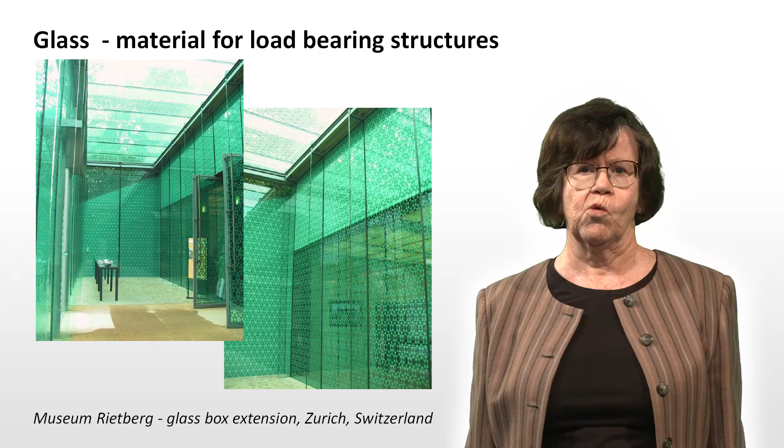Due to new technologies in production of glass and improving mechanical properties, there is a significant expansion of the applicability of glass to structural elements such as railings, stairs, glass beams, or even columns and load-bearing walls, as can be seen in the photos.

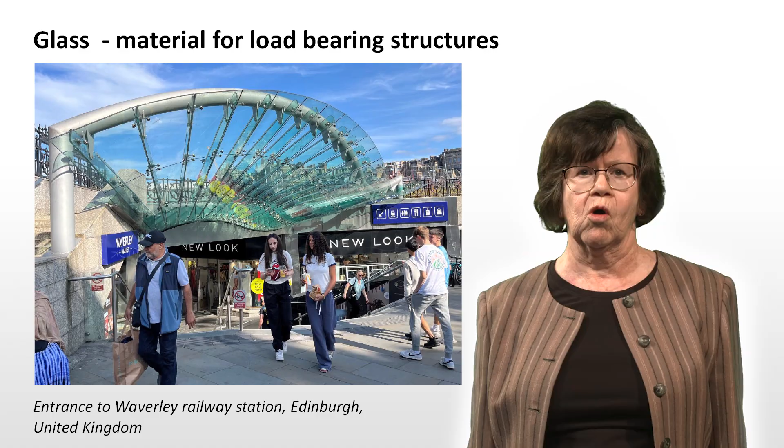In addition to their own weight, these load-bearing glass elements are also able to transfer snow, wind, and imposed loads. However, the design of such structures must be safe, taking into account the collapse consequences on both property and human life. Therefore, regulations have been put in place that define material properties and manufacturing, standardized procedures for experimental verification, and regulate the design of building structures.

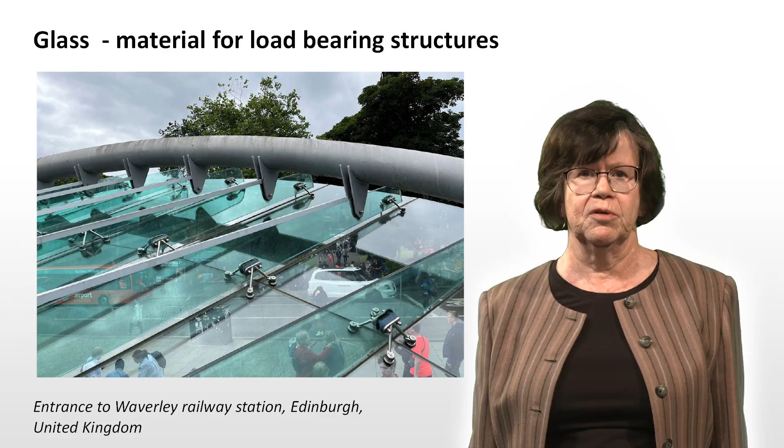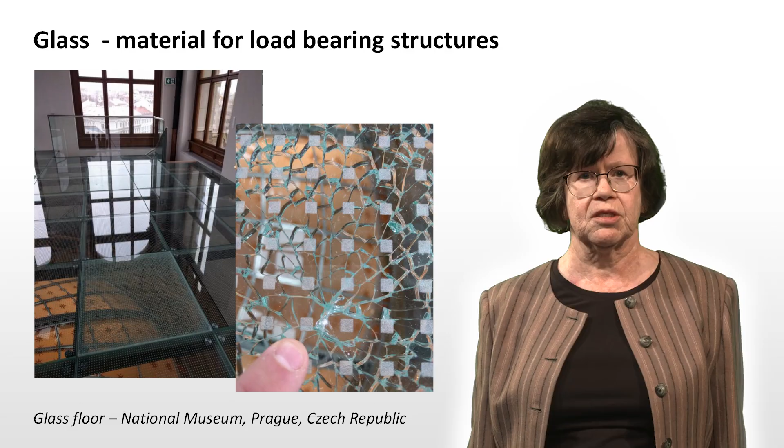From the national standards used until the beginning of the 21st century, the European Union has moved to the Eurocodes, which ensure the unification of general rules for manufacturing, testing, design, and assessment in the field of building structures. The aim is to ensure the same quality and safety in Europe in the field of civil engineering.

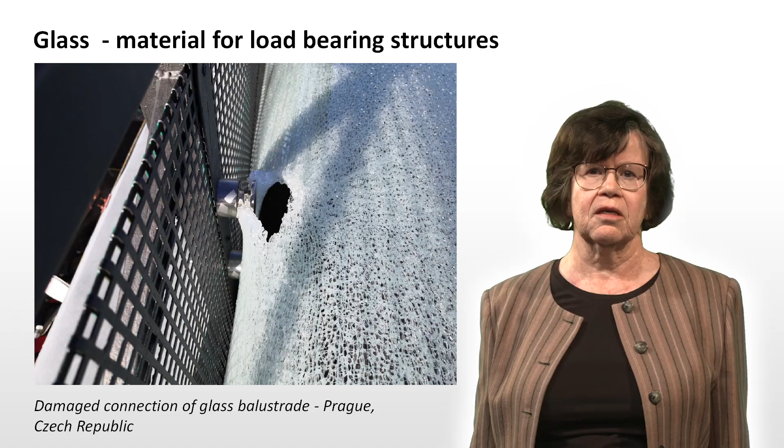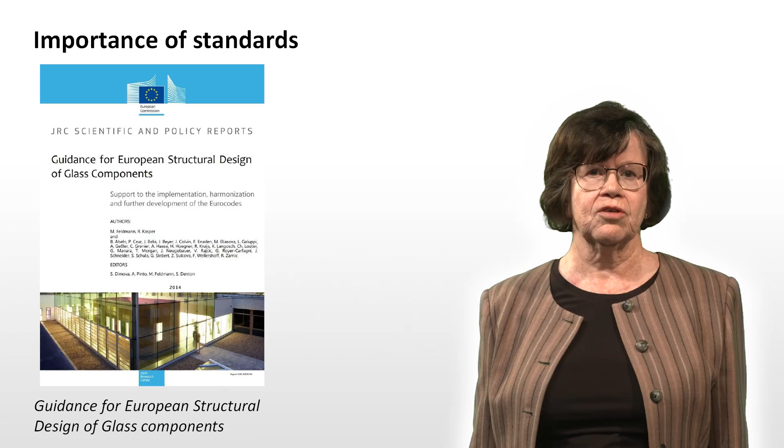The Eurocodes provide general design criteria and methods that meet the prescribed basic requirements in terms of durability and reliability. They also provide general guidance for designers, operators, owners, contractors, and manufacturers of structural products. In addition, these standards allow exchange and cooperation with EU countries.

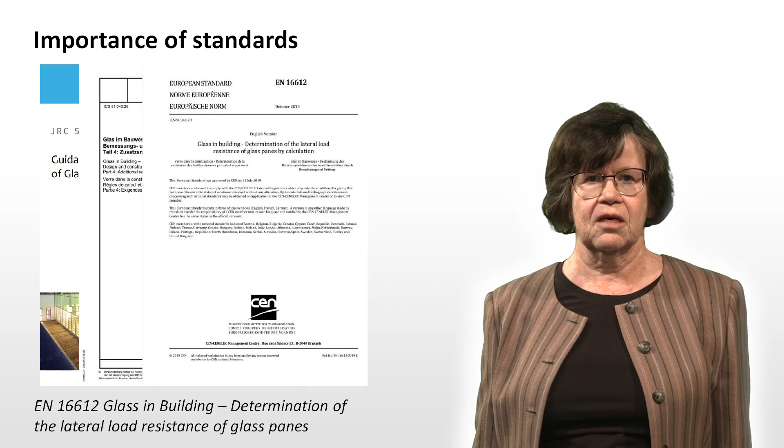However, national standards are also used within the European Union in cases where Eurocodes have not been issued or have not addressed national conventions. There exist American, Australian, and other standards outside the EU.

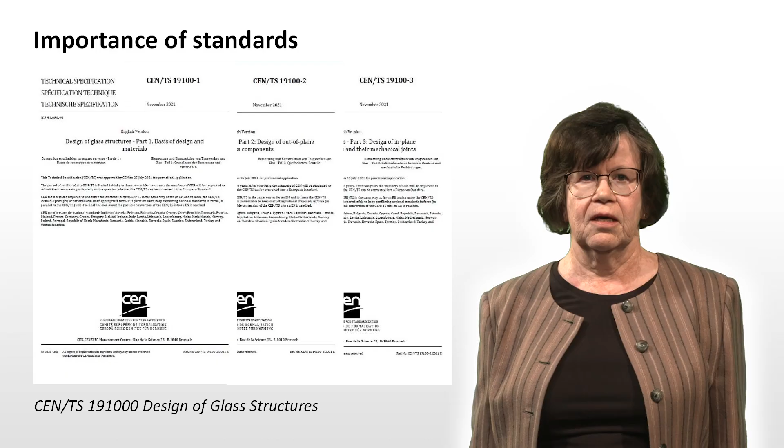Harmonized European standards are currently used within the European Union. These standards establish the same rules in all European countries, allowing for a free market for goods, projects, flexibility, and the same standard of products and goods or design.

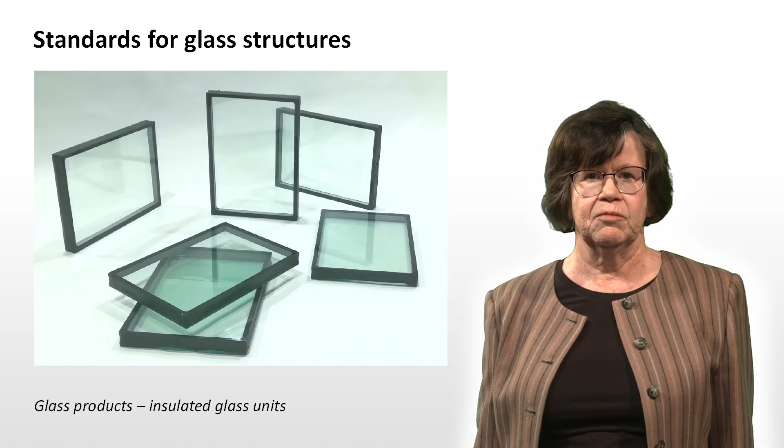Standards related to glass building structures can be divided into several groups. The first group is focused on glass production, including material properties, production tolerances, size, thickness, initial imperfection, and so on, rules for refining soda lime silica glass by heat or chemical treatment, and rules for the production of laminated glass panes.

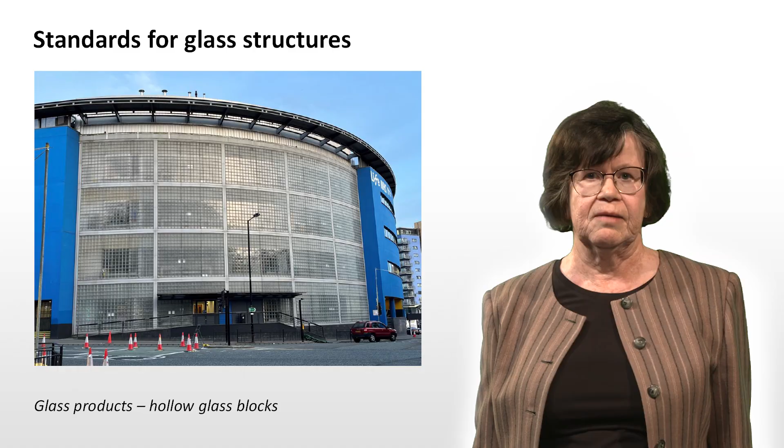This group also includes production standards for glass elements used in construction industry, such as U-profiles, glass hollow blocks, glass bricks, and so on.

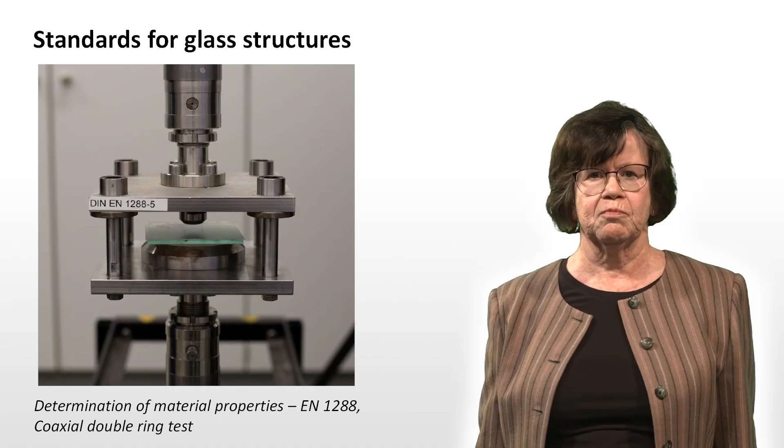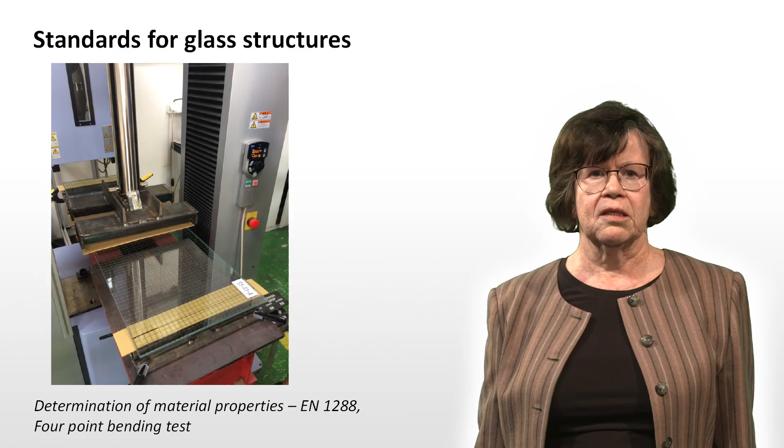The second group of standards deals with the material properties of glass and the method of their determination. Various tests are used for this purpose, such as the coaxial double ring test and 4-point bending, according to EN 1288. By evaluating the experiment, the tensile strength of the glass under bending and the Young's modulus can be determined.

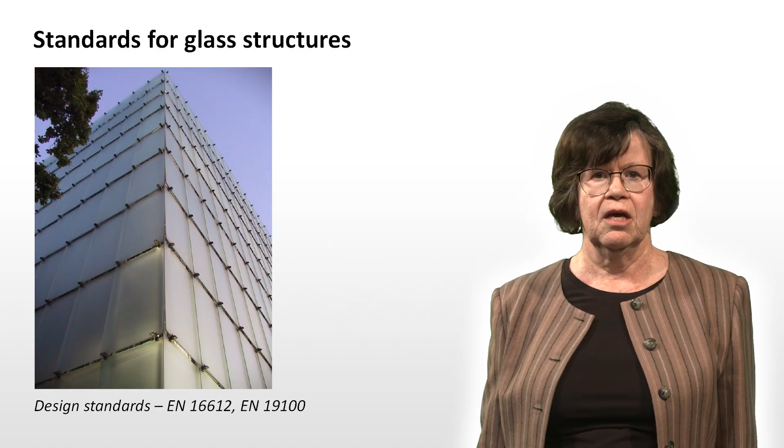EN 16612 can be used for design of infill panels that can be classified in glass consequence class less than CC1. This includes window glass or insulated glass units made from monolithic or laminated glass pane, simply supported along the edges and uniformly loaded perpendicular to the surface.

At present, a number of national standards, for example German, Italian, Dutch, can be used for the design of structural elements. The European standard for the design of load-bearing glass structures is under preparation. It will be available with the new revised generation of European standards under the designation EN 19100, and will be intended for the design of structural elements of glass consequence class CC1 and higher.

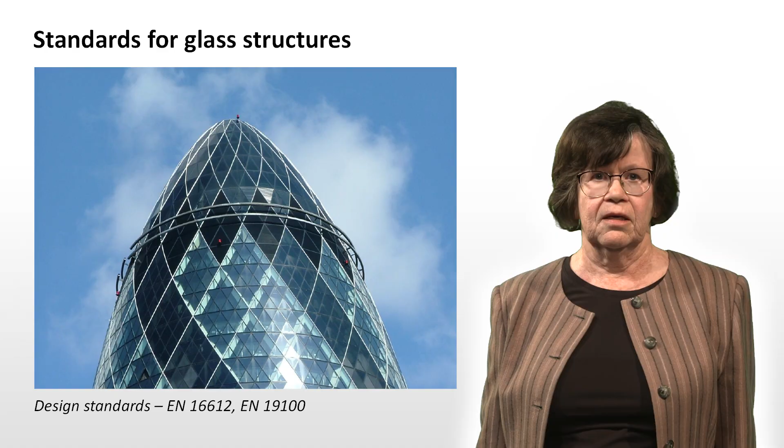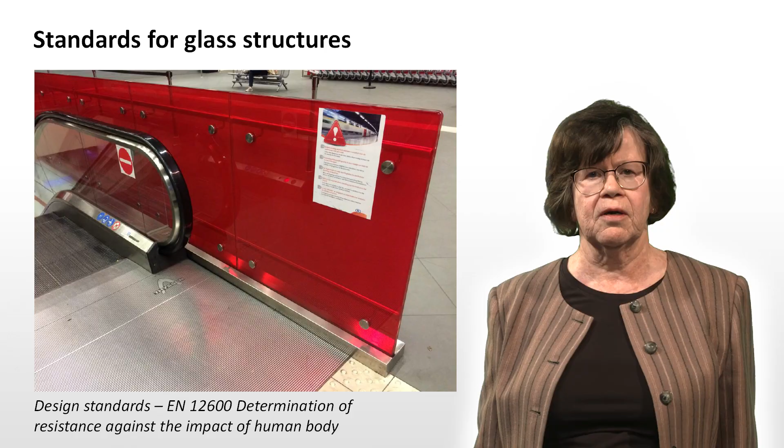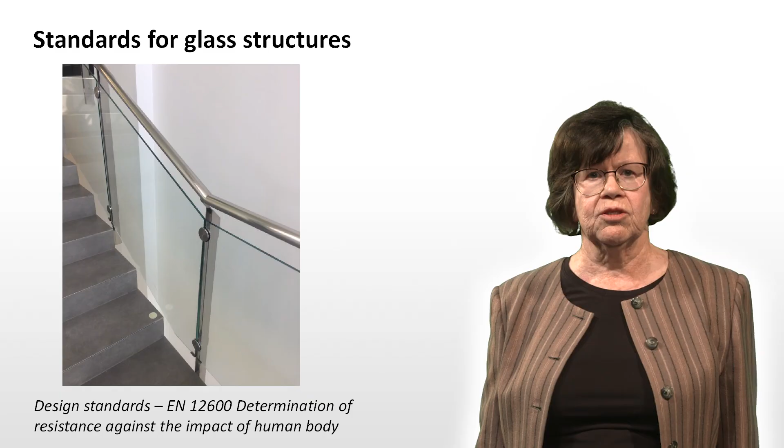It's necessary to experimentally verify the impact resistance of glass elements exposed to human body falling, according to the EN 12600 standard, to ensure safety of the users. This is important whenever users could be injured by falling from a height, as in the case of glass railings and windows with railing function.

The principle of the test is very simple. A glass pane is subjected to the impact of a pendulum with the weight of 50 kilograms, which simulates the human body. The impact is repeated with increasing pendulum drop height, and the failure mode is monitored. The glass panes are sorted into corresponding safety classes according to the test results.

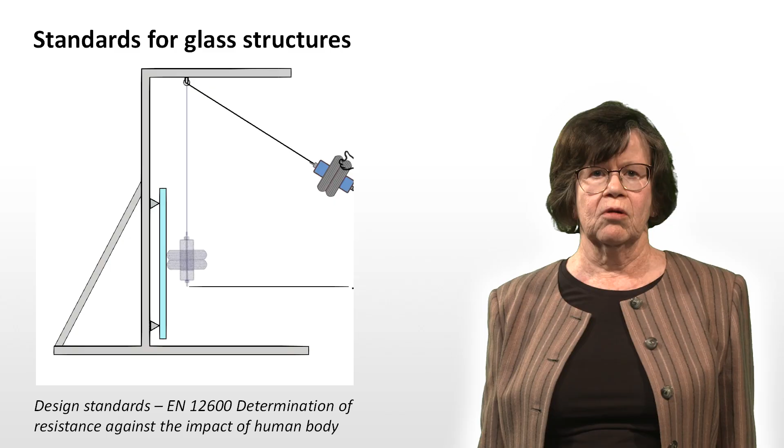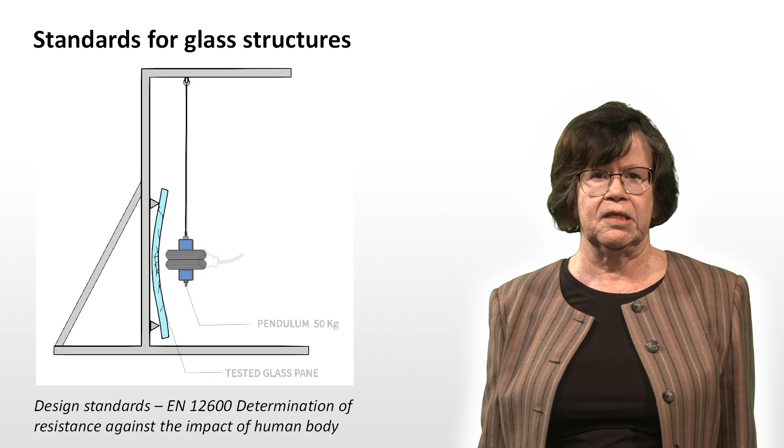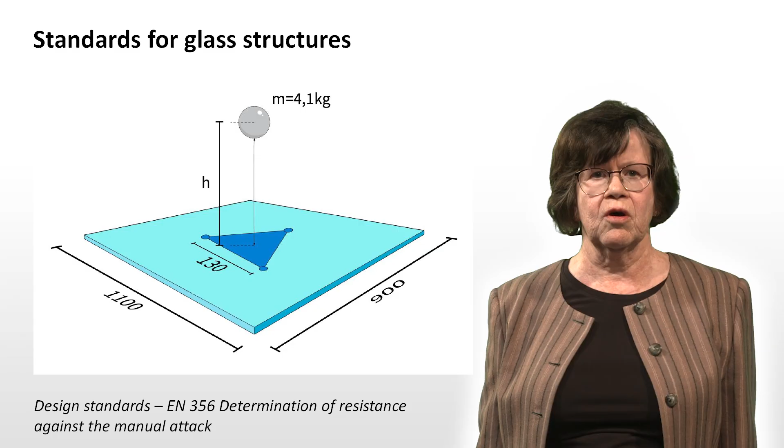However, glass can collapse not only from the influence of human body impact, but also from a manual attack such as burglary. The resistance of flat glass pane against manual burglary is tested according to EN 356 standard in two ways. According to the first method, the resistance of laminated glass to the impact of a steel ball with the weight of 4.1 kg from increasing height is determined.

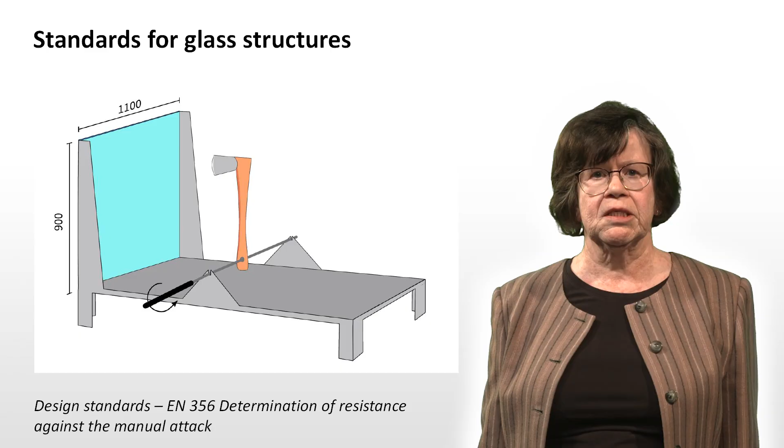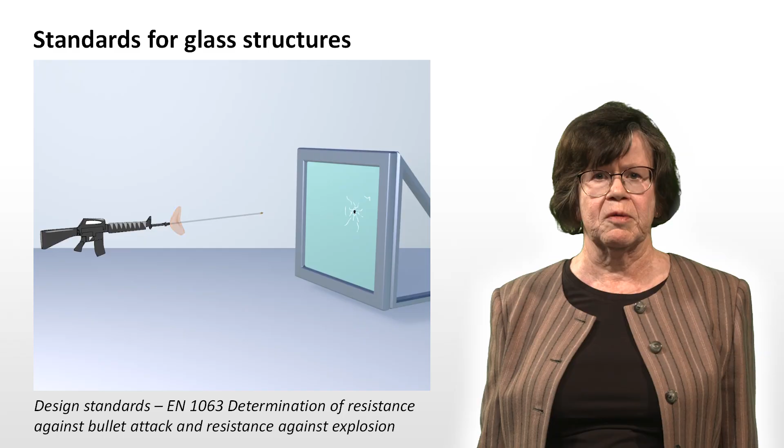According to the second method, the glass pane is tested with a hatchet, where the number of hatchet hits determines the resistance. The last group of standards is focused on the resistance of glass to firearms or explosions. Laminated glass panes are tested for various types of weapons like military, hunting, hand weapons, caliber, mass, distance of shooting, speed or number of impacts.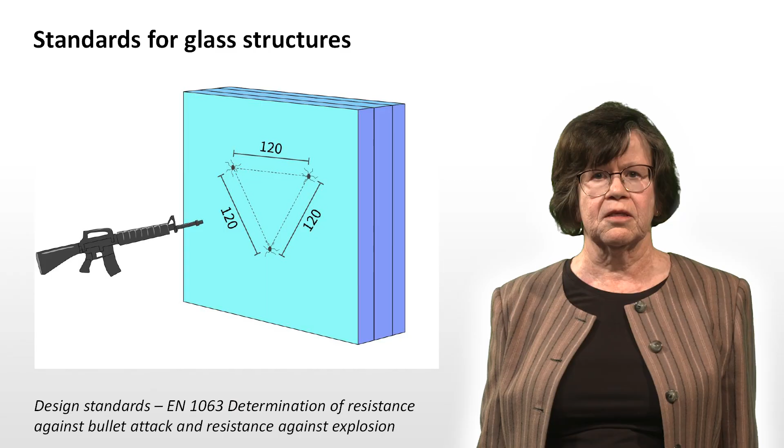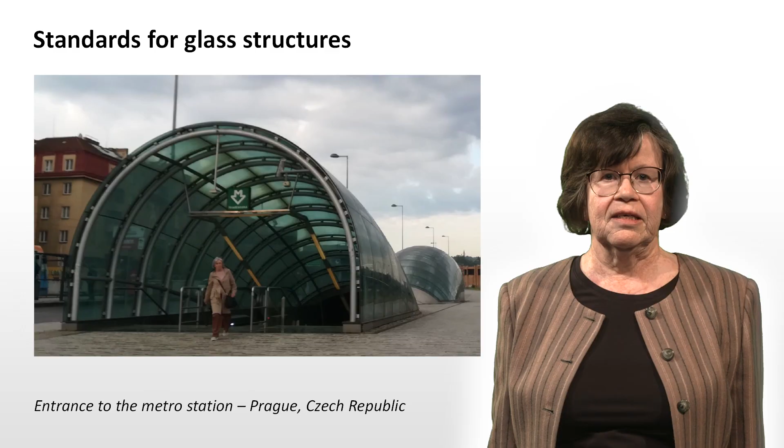The explosion-resistant glass panes are classified according to the resistance to maximum pressure of the reflected wave. The above standards provide the necessary rules for structural glass elements to meet the reliability and safety requirements of building structures. The manufacturing, design, or composition of glass panes used in structures must meet the limits, tolerances, and material characteristics specified in the standards to be used without problems throughout their service life.